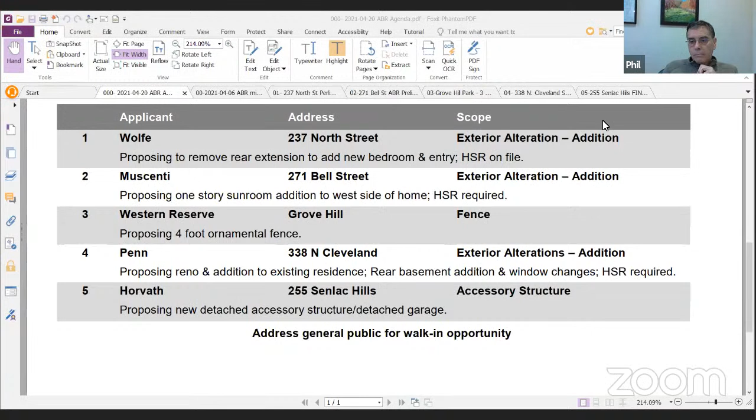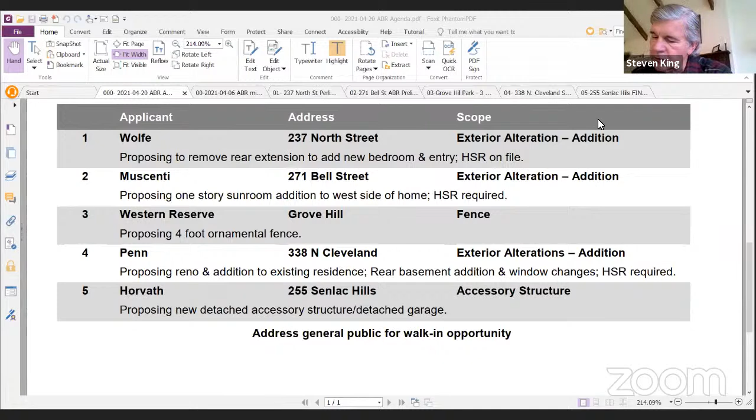First order of business is a reading of the minutes from the previous meeting, which I was not attending. I have a motion to approve the minutes or comments on those minutes. I move to approve the minutes.

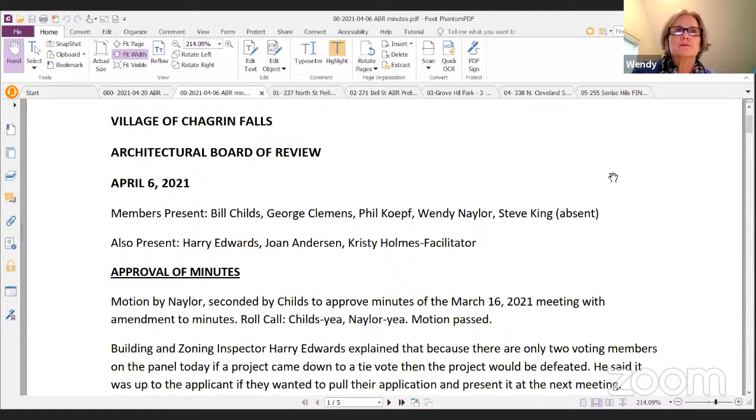We need Bill, I think he's going to be late. Remember, he's getting his second COVID shot today, he was going to join us late. Okay, we'll just push the approval of those minutes back. I cannot comment on this.

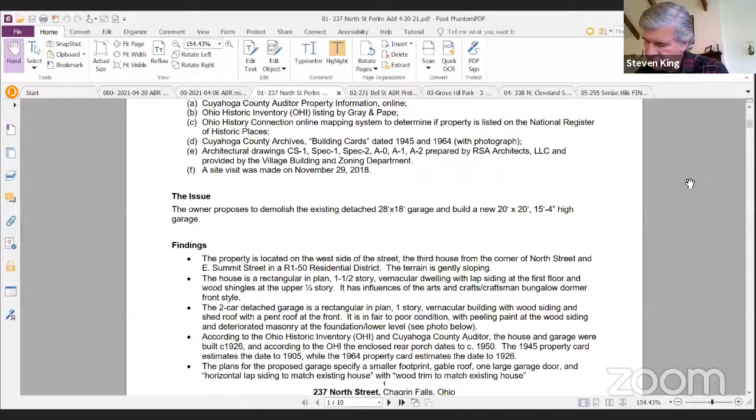Therefore, the first order of business is Wolfe, 237 North Street. We have an HSR on the property. It is not 100 years old, but it is 50 years old. Prospectus did their evaluation, determined that it is not historically significant, even though it is 50 years old, and therefore the changes would not have an adverse effect on its significance. They also determined it would not have an adverse effect on the proximate historically significant structures.

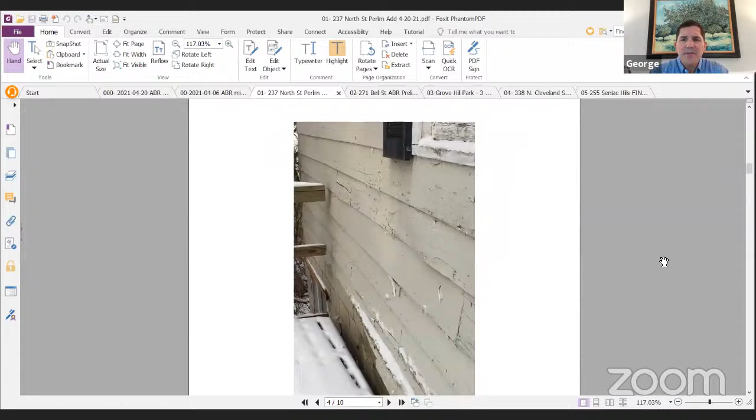I read that differently, Steve. Okay, first of all, this is from last year, but it does comment on the house, and I thought it said the house is historically significant as a potential contributing structure. Yes, all right.

Here we go. The first thing under conclusions, read that. Does meet the standards of historic significance.

So their conclusions about the project are irrelevant because they pertain to the garage, but their general conclusions, and Harry asked if we thought we needed a separate report for this. But I think the conclusions about the house are clear enough that we can treat it as being historically significant and go from there. And that's a higher standard for the project. I accept your correction.

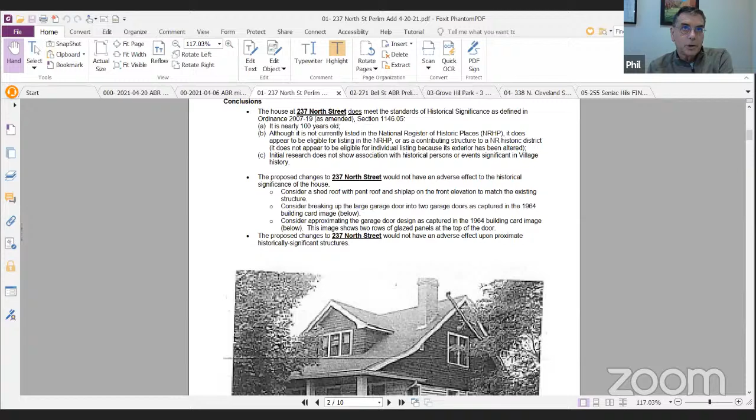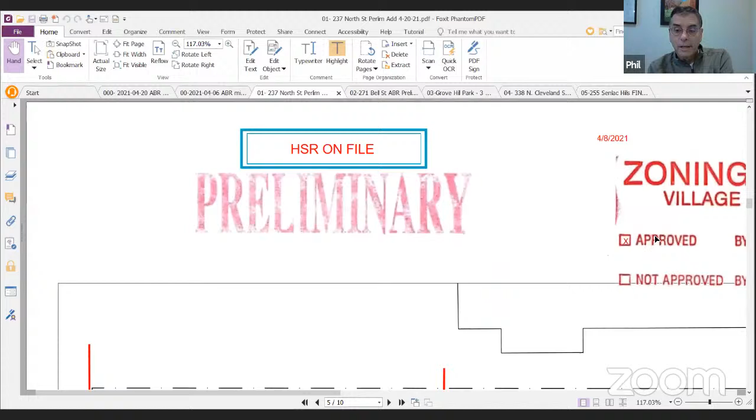So, because we did the garage last year, as you just said, the significance report relates to the garage that was demoed and reconstructed last fall.

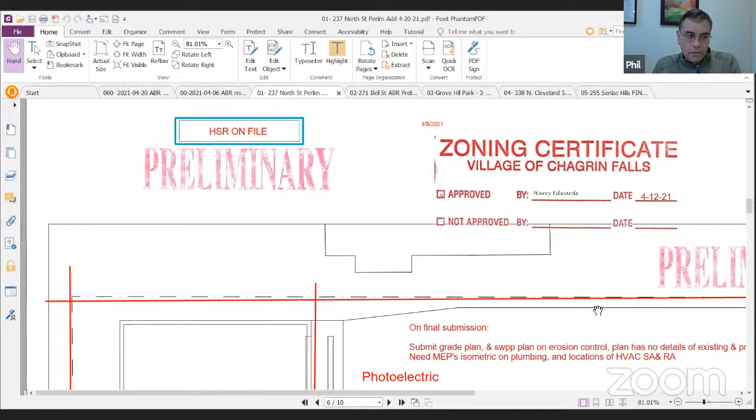The owner wanted to get the garage done last fall, and now is looking to add a first floor master so that they can stay in the house.

What you're looking at there is there is a small, it's now a bathroom, but when it was first constructed, I believe it was like a little dining area stuck on the back of the house, where the dashed lines are in the lower corner.

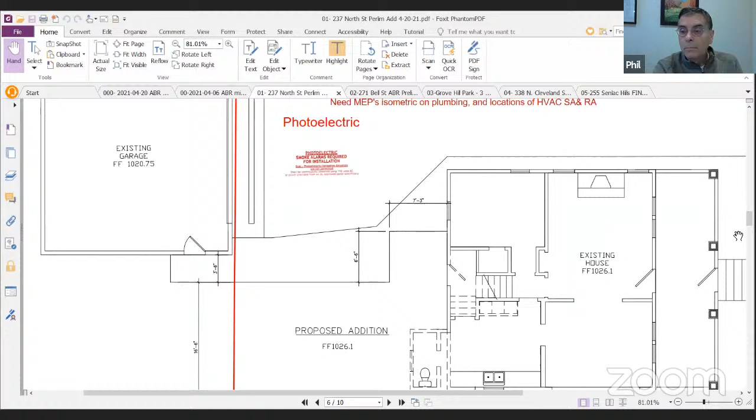Harry, could you move? Let me see. Would you like, Phil? I can do. Yeah, let me go to the next. The A2. So what we're doing is we pushed the garage off the property line so that it was in compliance, and you have to kind of steer around the house.

So we added this bedroom, bathroom, and a new rear entry, and it's all designed so that you can still get in and out of the garage. The house is extended out to the 3-foot property line, and it drops in grade considerably.

So if you look at the next page, Harry, elevations. You can see that by the time you get to the rear corner, it's almost to a new basement level.

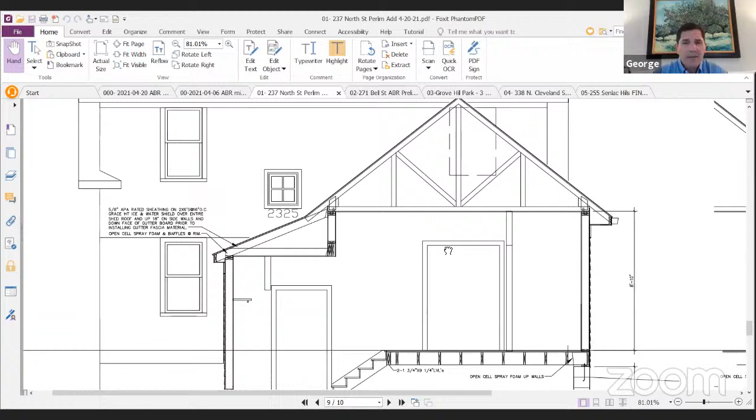Yeah, I think this is nice. I see what we're trying to do with everything, and I like it. If you go back up to the elevations, Harry, go to the right. There you go. In this elevation, I was thinking those shingles are coming down low, but I think it's just because your belly board or frieze board should actually track around the back rear elevation right over those windows, and it got lost on that in the rear elevation drawing.

So if the frieze boards track around, they help separate the shingles from the siding below. I think that will be helpful. Yeah, I agree. Other than that, I don't have any comments.

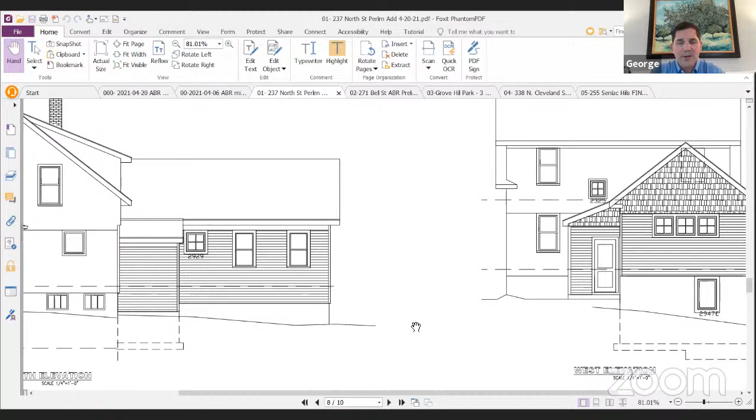I mean, I think this is nice, and it's tricky to fit it in with the garage. You're close to the garage, so you've got whatever fire issues you're probably dealing with, Harry.

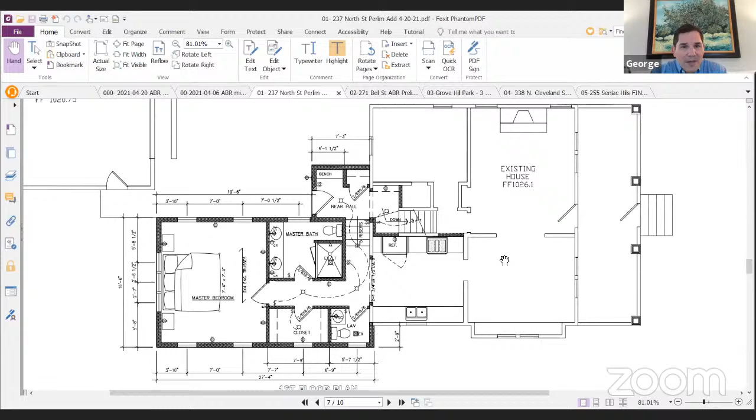I think maybe that master suite, you may want to move the door over so your master bath and closet are inside it, but for privacy. Other than that, I think this is a very nice little addition tucked in, and I don't think it has any adverse effect because it's clearly distinguishable from the house.

And then what kind of windows are you putting in? All the windows are vinyl now. They've all been switched out before he got there. So the new windows are going to be vinyl too. I know you're doing vinyl siding, but are you doing new vinyl windows?

No, I'm not sure I even talked to him. My preference is always wood clad, aluminum clad wood. That's my preference. In fact, that would help, because I understand you're trying to tie the vinyl to the existing house. Maybe you could do something with the windows. My preference, honestly, because these are all venting - the little 12 by 12 or 20 by 30, whatever - they're all venting and you can't do that in vinyl.

So it's going to be Pella wood. And then if you could commit to using the Azek trim that matches the dimension of the house and subsills, so it has that traditional look. I think that group of three looks like it might not have a subsill shown, but if you use those, I think that's helpful.

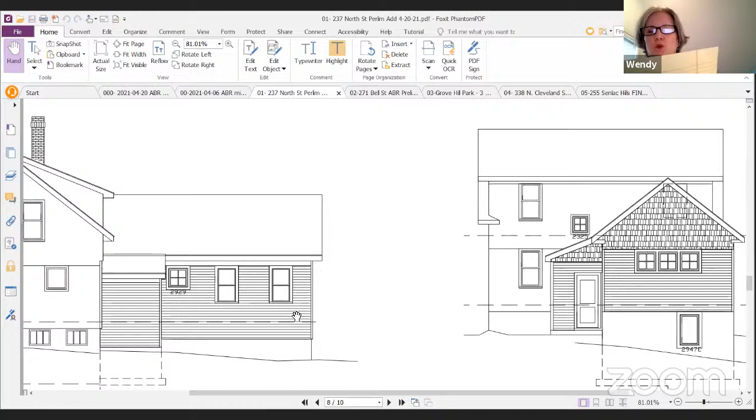Wendy, can you just repeat it? I'm sorry, or you can just send it to me if you want. I'll do it one more time. Motion for preliminary approval with wood or aluminum clad windows, to add trim details and continuation of frieze board to rear elevation, trim and Boral trim.

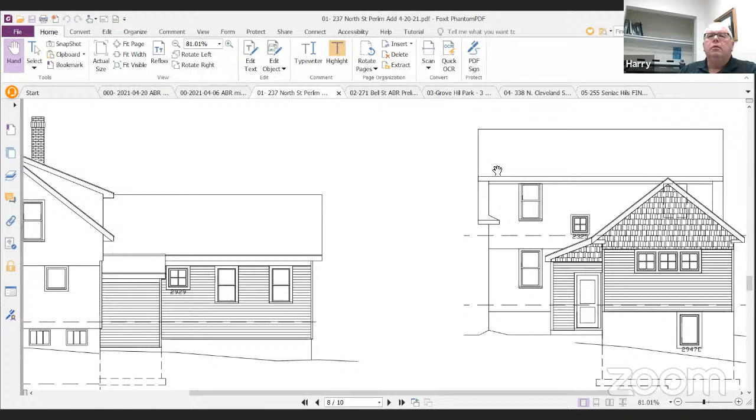Hi Dave, how are you? Good, how are you all? Good, good. Welcome David. Oh, David, hi.

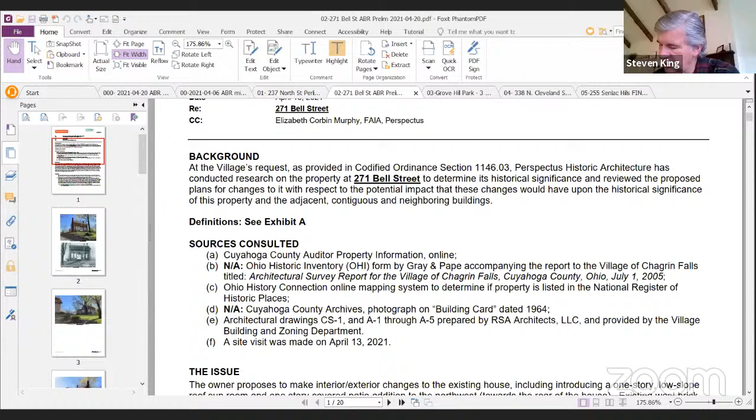An HSR for 271 Bell does meet the standards of a historically significant house. Over 100 years old, it's well preserved for the most part.

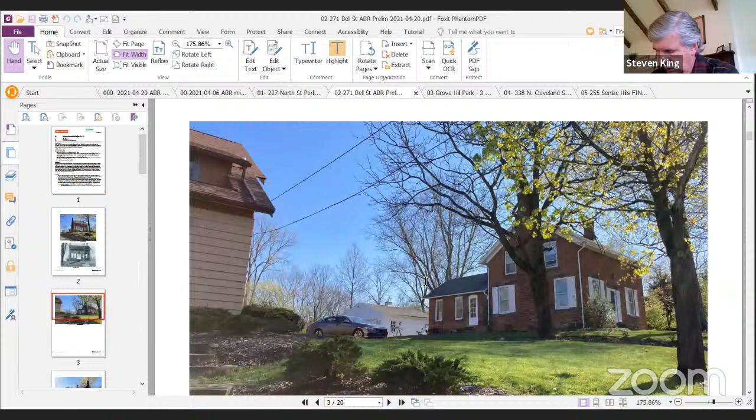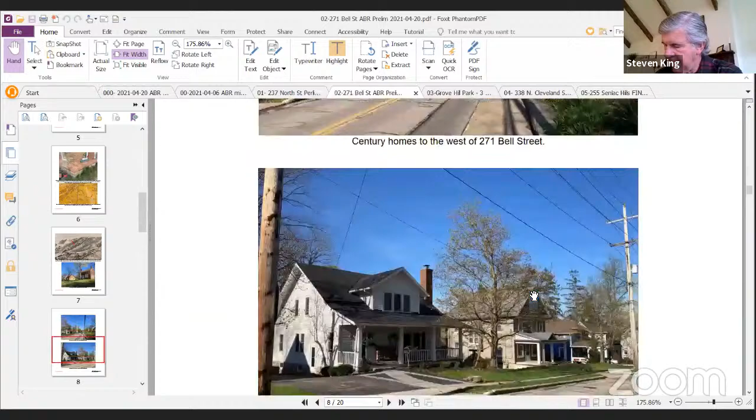They've determined the proposed changes diminish the character of the house as viewed from the street: a large volume added to the house, transom windows, stylized pilasters, bed mold, crown and paneling, and so forth. They suggest lowering the roof line and using different materials. General consideration.

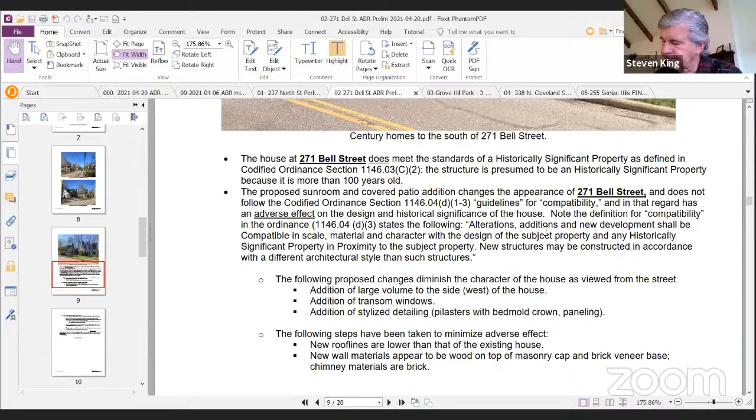So let's take a look at the plans.

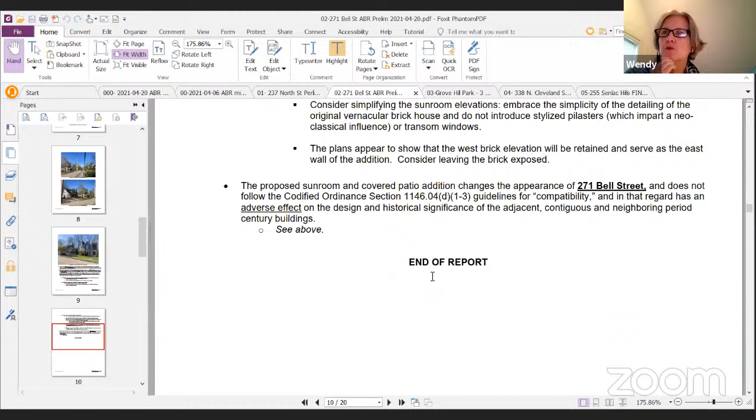Do you want to accept the HSR? Yes, I move to accept. Receive, okay, second, or however you want. Motion by King, second by Naylor to accept HSR. Naylor, yes. King, yes.

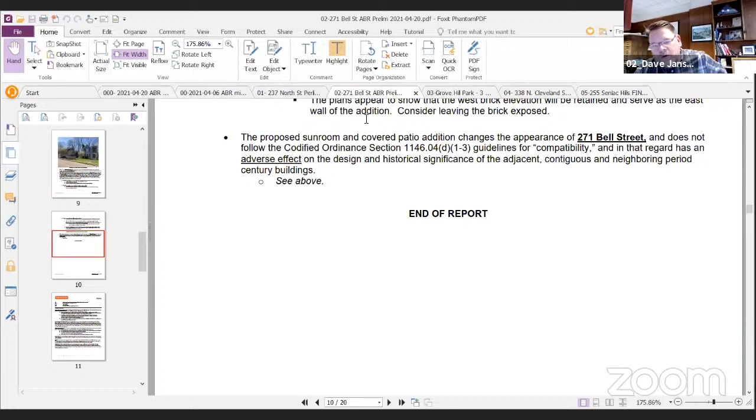Here we go. Wait, could you go up to the site plan just for a sec?

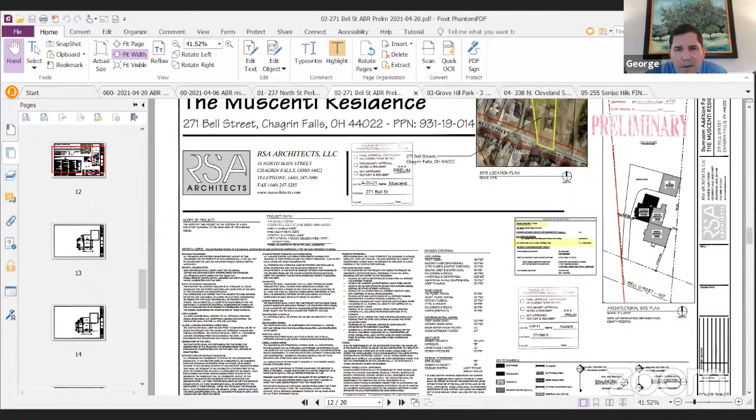Absolutely. Thanks, Harry. So it really relates from the street, it leaves that front house as it is, doesn't touch the front house. It really relates sideways to the rear. Gotcha, thank you.

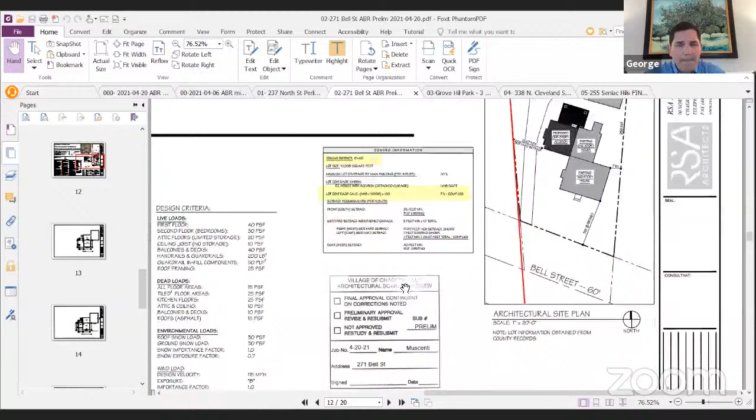All right Dave, we'll turn it over to you, you just tell me what page you want me to go to. We'll start with elevations, obviously. So yeah, like George had said, when we were looking at this, the idea was to try to leave that original portion of the house by itself, so we didn't impact that.

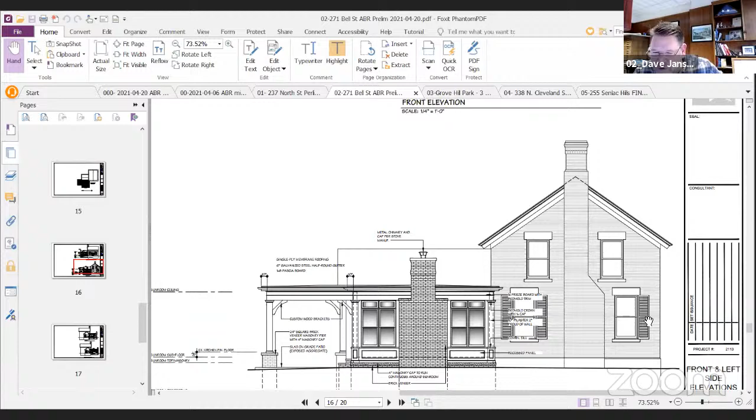I believe the rear, and I think it even said so in the report, was probably not original to the house, which is what kind of facilitated where it goes, and it also worked well for the layout because that's where Tom's kitchen is right now. The other design intent was to not do this thing out of brick, try to make it stand out on its own, so we're not trying to fool anybody into thinking this was original to the house.

The idea is to get a nice sunroom, sitting room for him. The house is, by today's standards, fairly small, so it would give him a room that he would like to watch TV or whatever. So in doing that, I guess I tend to want to make it as nice as possible.

That's why I didn't want to have any siding on this. I was trying to keep it to basically all trim and recessed paneling as much as possible, to use a consistent window size around at least the two sides, and keep it as a low roof so it would not compete with the height or the scale of the existing house.

Looking at the HSR report, I think I could see where they are coming from, and the owner might be open to, I could probably reduce a couple feet out of the width. Looking at the front elevation, that width, it may be a little bit out of the depth.

So I think I could get that 19 feet coming from the house down to maybe about 17, and whatever that width is, I could probably take about a good 16 inches out of that, without making a huge impact on the use of the room. It'll push it further back from the front elevation, so it'll get closer to that existing door opening that's there now. Oh, I see.

Well, I mean, this is just straightforward, you're adding a room and a little covered patio, but you're basically replacing, I mean that's your rear entry as well, right? Yeah.

I mean, I'm not sure, I think it's successfully scaled down from the house with the flat roof. The historic report did not object to the flat roof, and I tend to think the flat roof is a pretty good solution here because it differentiates so clearly, and I like the fact that you don't have siding on it, that it's paneled.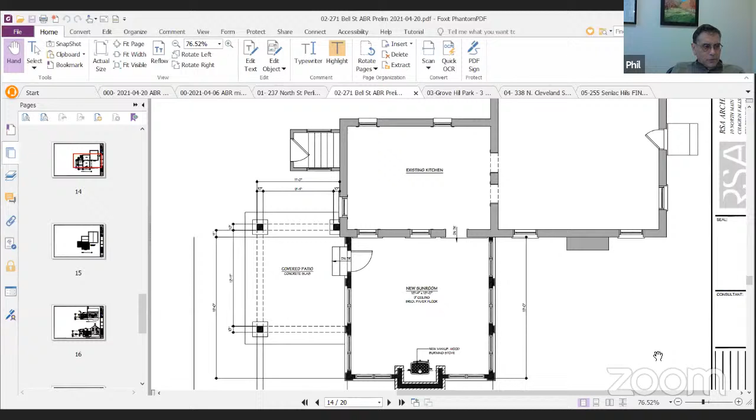The difficulty I have with the transom windows—I like what you came up with, I like the cadence and the scale of the things. But to me it seems almost too much detail. And the transom windows, I just got to believe there's a better way to do that.

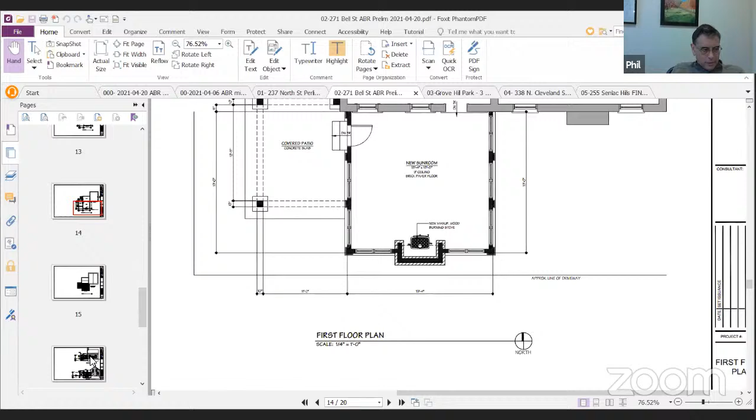What if you just made them tall, narrow windows? Taller windows. You can certainly eliminate the transoms with taller windows, and you save so much in the framing of those transoms.

The design of that house is very simple, and I think the simplicity of it is what's so wonderful about it. I'm not seeing any paired windows in the existing house, and I'm wondering if you can translate that into a simpler design in the sunroom. I agree the scale's good, you've set it back, you've tied it to the house, but I'm still finding too much action going on.

Did you look at just tall casements or something? I did look at tall casements, but the owner did want double hung—not that we couldn't have that discussion. I could look at making a taller window.

In response to the amount of detailing going on there, my thought is it's a sunroom, so we're not trying to repeat the aesthetics of the existing house. And I think once we have this thing all painted out white, it's going to flatten out—all those lines you're seeing are going to become very blurred. I guess I hesitate to make it too simple.

I think your next step towards simple is making this a complete modern design, and I don't know if the board would prefer that. If you want to see one window, it's instead kind of a solids and voids pattern. That's where I'm going—something needs to blend a little more with the existing house. I know you're trying to do a sunroom, but I'm coming from a different direction altogether here.

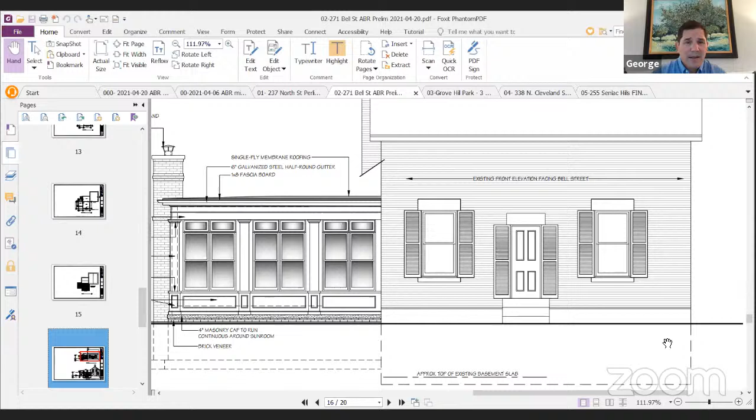I think this is going to be a calmer approach, and I agree. I think you can get rid of a lot of lines by just extending the double hungs upward. And taking your point, Steve, I think using pairs of double hungs is going to feel more comfortable with this simple double hung house - double hung windows with no grids, no muntins. Maybe there's a way to make this simpler if you do brick pilasters, and all you do is like 12 by 12 brick pilasters around the thing.

But I do think that's a pretty calm approach. When you paint it white, no one's going to think twice about it. And I think the flat roof really lets the little schoolhouse stay little, because this reads like a separate thing. My fear would be to put a gable roof on this - it would totally drown out the original house. I think that would be really big, that would be a mistake, especially at the roof pitch it has.

I do think that bed mold - to be super picky, but Bill's not here - the bed mold ought to come down so it's like a third up, then above half. Yeah, that's just my classical comment.

I think the biggest thing for me is the windows. It works, it accomplishes what the owner wants to accomplish. Push it in, push it out a little bit - I don't think it really substantially changes how this is going to feel. But don't make it a foot smaller, because if it's too small, it's a terrible waste.

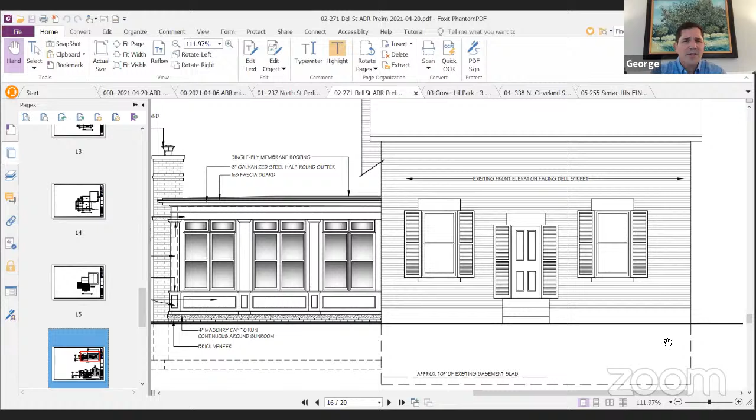Harry, can you go to the side elevation? I think sometimes I wish I'd just drawn trees on it, and that's probably what it's going to look like, and no one's even going to see this thing. You're allowed to do that. Yeah, there's the rear - oh wait, what about the side elevation?

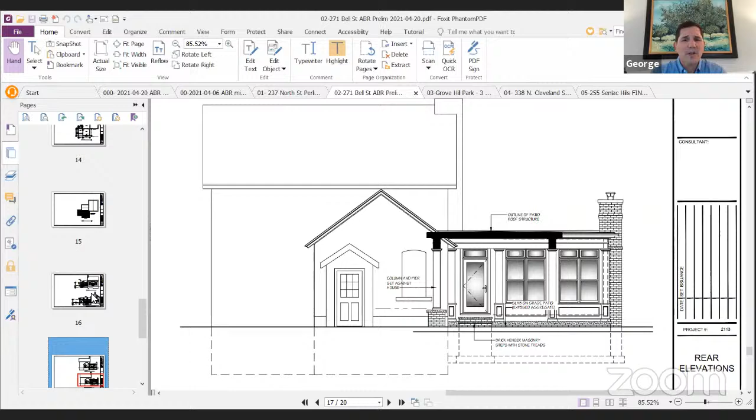Well, go up to the rear elevation that doesn't cut through the entry. Which is nice, I think. Same comments. Then what about the side elevation? I think the side elevation shows how far back this thing sets, which is really critical.

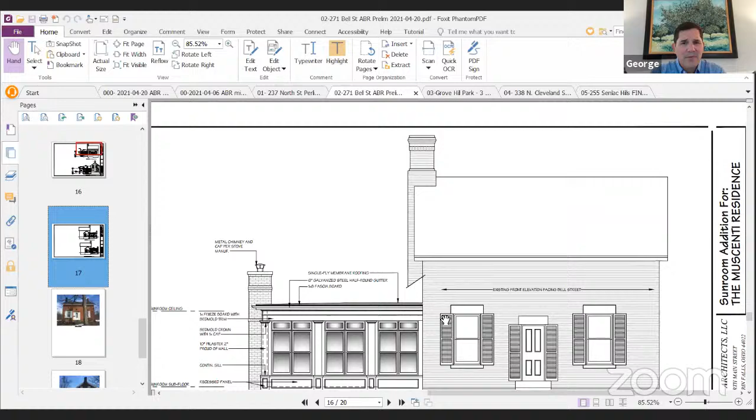Oh yeah, right there, down. There we go, thank you. I think that shows you really stepping back and letting the old schoolhouse still retain its character completely, which to me is a successful strategy. I just think that's the right way to go - so much better than if it was on the side of that schoolhouse form.

And it clearly still reads as an addition, I did, obviously. We're in, I used to do a little more historic work before, and that was always critical, at least for the state of Ohio, that additions read as additions, so you can still identify the original house or structure.

So are we ready for a revise and resubmit? Yeah, motion to revise and resubmit with restudy of windows and simplification of design. Sounds good, I second that. Motion by Naylor, seconded by King for revise and resubmit. Naylor, yes. King, yes. Okay.

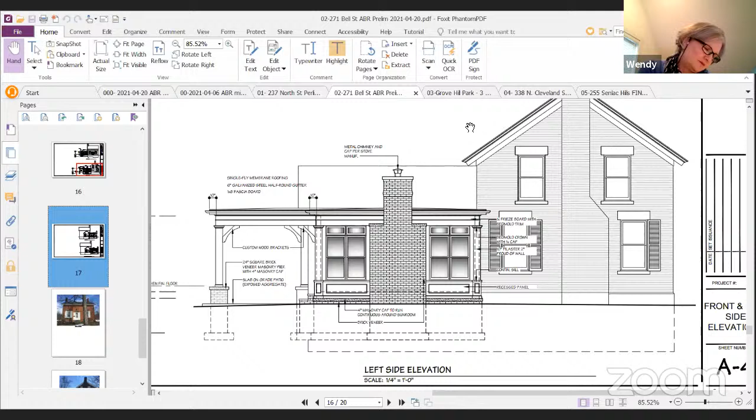Is that submission this Thursday, Harry? Or Friday? Friday. See you Friday. Very good, thank you, sir. Thank you, thanks everybody. Hey Dave. You're welcome.

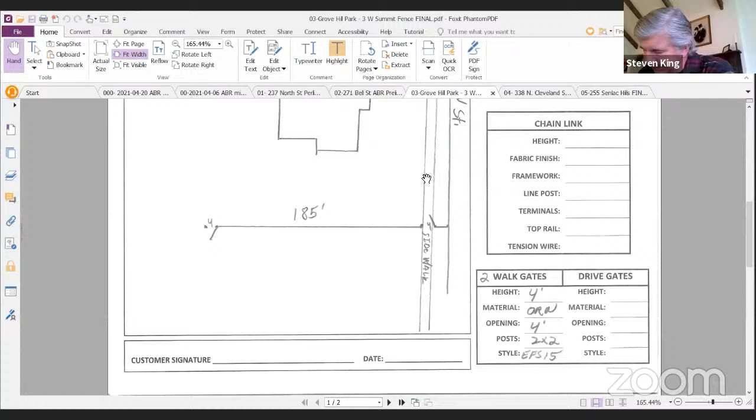Grove Hill. The fence, yes. So let me give you a little background here why Christie brings up Amy.

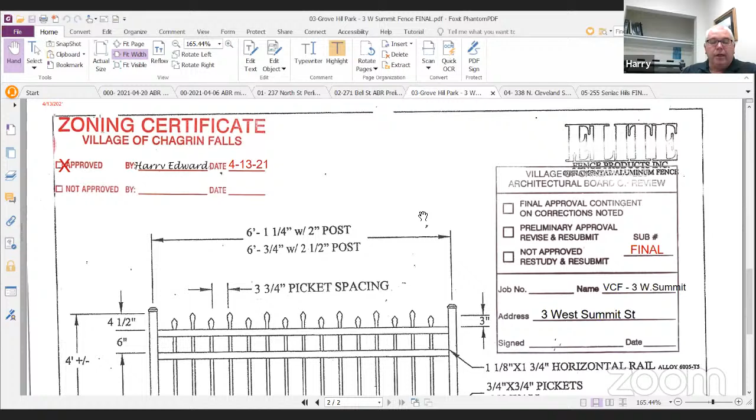This fence is in conjunction with the Village of Chagrin Falls. It's a fence dividing the proposed Grove Hill Park from the back of the Galucci House at 3 West Summit Street. It was part of the deal to save the Grove Hill House, like one of the last components. And it's just across the hill in a straight line.

Correct, I think this is really straightforward. It's going to be done nicely. I think we should just go ahead and vote on this and say let's do it. I think she's going to bring Amy Sargent from the Western Reserve Land Conservancy to talk about it. Good morning everyone. I'm not sure what you need me to present or share here, but if you have any questions, I'm happy to answer them for you.

Where does the fence sit in relationship to the bluff? It's about halfway down the hill, it sort of separates the property in half. So there's a half acre towards the top, kind of that drop as I recall on the property. So is the fence just at the lower end? Closer to the base of that drop. Okay, yeah, okay.

I'm good with it, but I'm trying to determine why we need a fence. I think it's being offered to differentiate the property, the private residence, from the village-owned portion, so people don't wander up the hill and feel entitled to it. Exactly, because historically people have walked through that property and accessed the sidewalk and gone up right past the house. So this is to offer a little privacy and separation to the residents, and it will also delineate where the park that belongs to the village is.

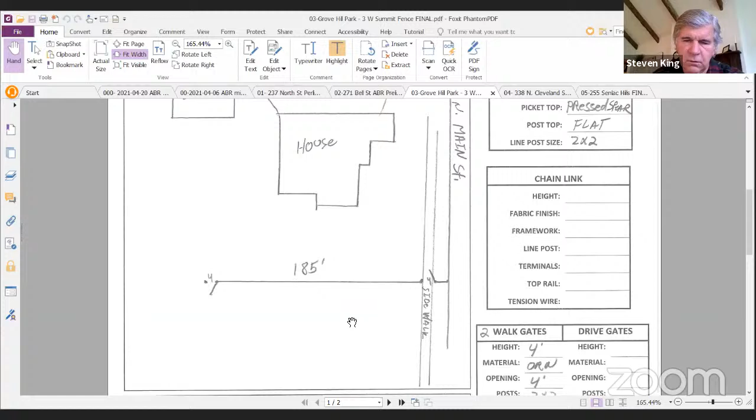So it runs straight across the hill and has a little tail on it, but it doesn't really... What's the tail for? That's a gate on the other side, I think, a second gate. At the gate at the other end? Correct. Okay, well, I'm not sure if that's the end of the fence, you don't need a gate there.

Well, I believe there's a little stone wall in there on that edge of the property. Is it the foundations, the old foundations for the greenhouses, I think? Is that right? That's way up there. Yeah, I think it's higher. So in other words, this gate is abutting some kind of existing stone foundation or wall?

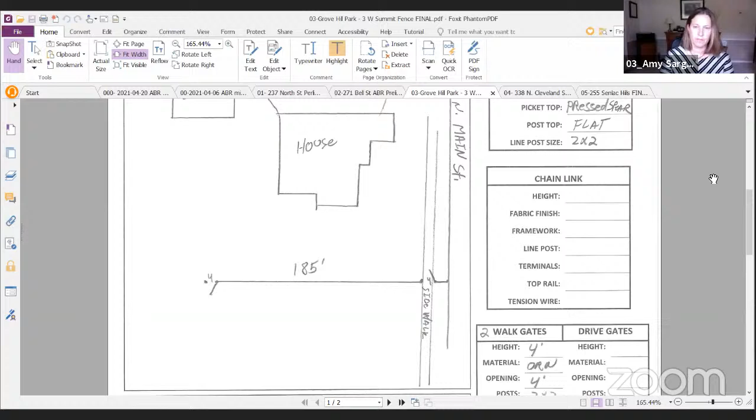I don't recall exactly, but I know the fence is to go to the end of the property, and there's a lot of vegetation. I'm envisioning a portion of a stone fence or stone wall there, but I'd have to go look again. That was at the request of the village and the homeowner, to have a gate at either end. Galucci's in on this? Oh yeah.

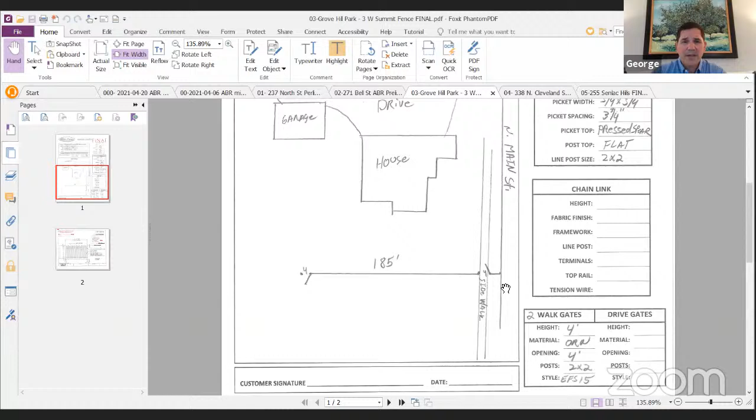I think you could give them the benefit of the doubt that it all makes sense, or we could have it taped out and go look at it. I'm inclined to give them the benefit of the doubt, but the other way is to have somebody mark it with orange tape so we could see where it really is. Was it staked out at all? Yes, there are some stakes in there from when we had the survey done for the property boundary, and that area has also been cleared in preparation for the fence.

It sounds fine. I personally like to take a look at it if there's no rush.

I don't think there's a real rush on this timeline for installation. It will take a couple of months once we order materials for them to come in, and the fencing contractor, Elite Fence, doesn't want to order materials until we have approval here.

Do we have an objection? Doesn't sound like it's a problem at all. I would like to look at it.

So you want to table for two weeks and then we'll go out and take a peek at the site? Sounds good. And this is a metal fence, correct?

Aluminum, yeah. What's the material? Is that some kind of aluminum? It's an ornamental fence, and the material is aluminum. It's not like a structural fence meant to withstand anything, it's more ornamental, the kind someone would use around a property.

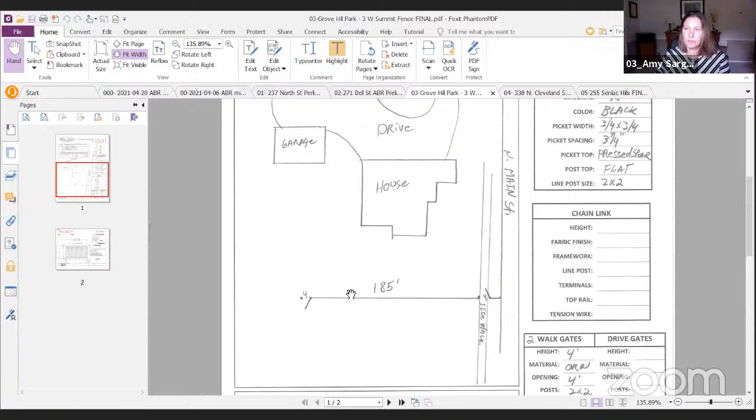Great, so we'll table this. Thank you for allowing us to go walk the site. Amy, you'll get another invite for the next meeting, which will be on May 4th. Okay, that sounds good. Thank you. All right, thank you for your time.

Board, do you have anything else? You want to move on to the next subject? Sure, 338 North Cleveland Street. Exterior alterations, addition.

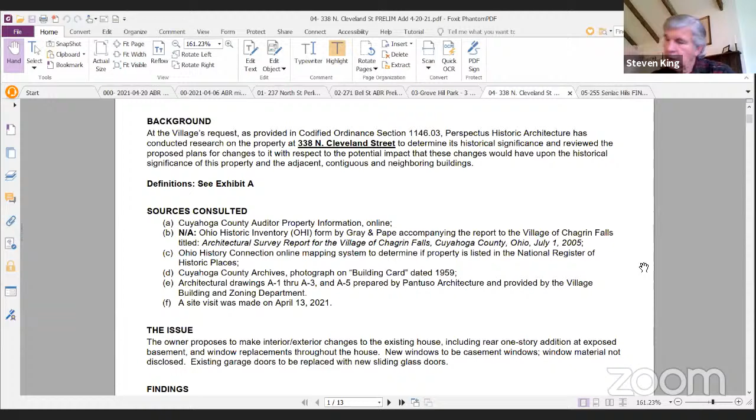HSR. The house is over 50 years old, so it needed a Perspectus. The Perspectus found it not to be historically significant, and therefore there's no effect on itself or other structures. I guess there's no structure in the area to be affected by it according to them.

I move to receive the report. Second. Move to receive HSR, King, seconded by Naylor. Naylor, yes. King, yes.

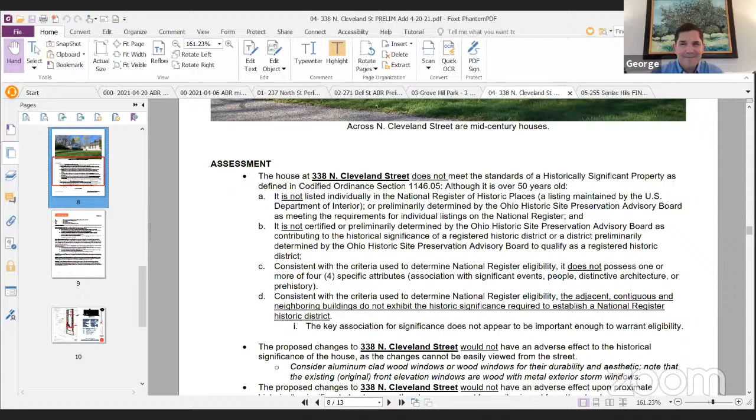Hi, Becky. Okay, morning. Morning, Becky. Morning.

This is the project we had previously. They're nearly complete with the detached garage, there on the right, and now we're doing phase 2.

What is the addition floated in your drawing? Yeah, it doesn't look like it's attached to the house, but the plan shows it that way. How is that? Okay, so...

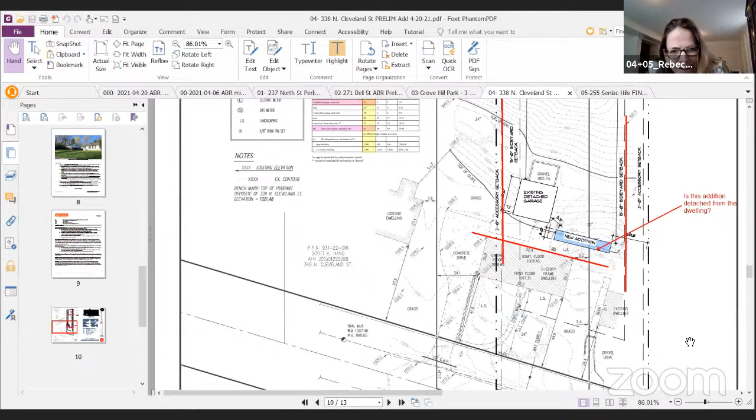Oh my goodness, yeah, something happened there. Wait, that's it, almost like the house floated because the house looked like it was half off its site, like an overlay. It's like a bumwad overlay or something. I think the house floated away. Your underlay showing the house floated away, that's what happened. I was thinking we'd do something special on this one. I didn't think it'd rain that much.

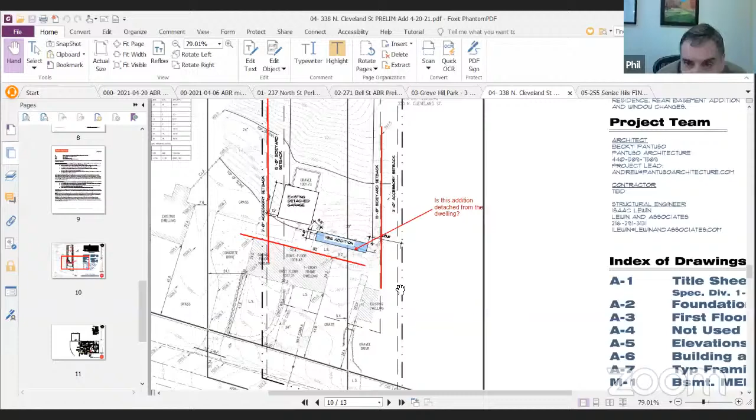So, it's an 8x50 trailer you're parking in the back. What the hell is that? I think...

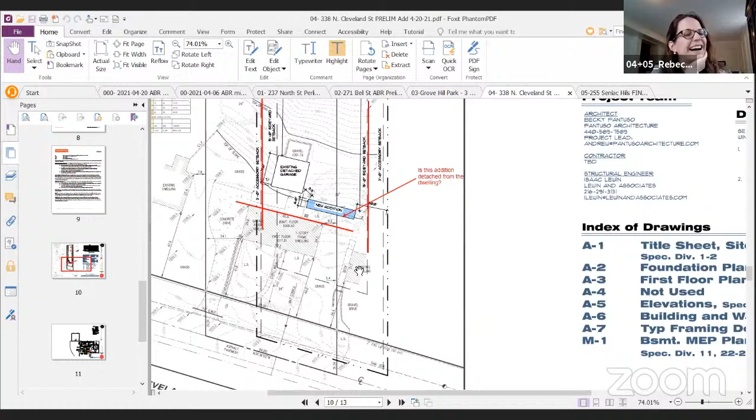Obviously you got to resubmit this to Harry, but if the location of the addition is correct and the house slid... No, it's just a viewport issue, like we have an underlay that just slid over. It slid over. God, okay. I didn't see that.

I don't know, but so if you go down here, this is obviously what we're trying to do. The garage is in that upper left-hand corner. We're tackling phase 2 of 3 now, so this is actually a really modest addition on the rear of the house.

It is the foundation plan. I mean, it's kind of like a raised ranch, so you come in on the upper level in the front.

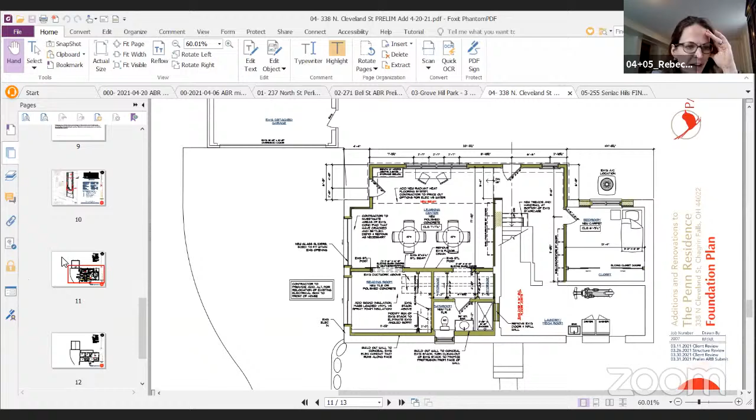So they have like a daycare downstairs or something? Well, not a daycare, but they do homeschool their children and periodically combine efforts with other homeschooled children. So actually really quite convenient in this time of COVID where all too many of us are homeschooling our children. God, hope they turn out okay.

A little COVID event every day there, huh? Oh my God, we're not going to solve that today. Yeah, sorry for what I'm contributing to society right now, but this is the addition right here on the back.

Like I said, pretty straightforward, modest addition to make that basement area work. Now that we have the detached garage, we can close off the existing garage and make it livable space.

Hmm, see that? I get it, I see. That makes perfect sense. So just sequentially, we had to do one before the other, and now they're ready to do phase 2.

You might want to review the historic report, because there is one, and it says it's not historically significant, correct, Terry? That's correct. We probably should do that first, huh? They already did.

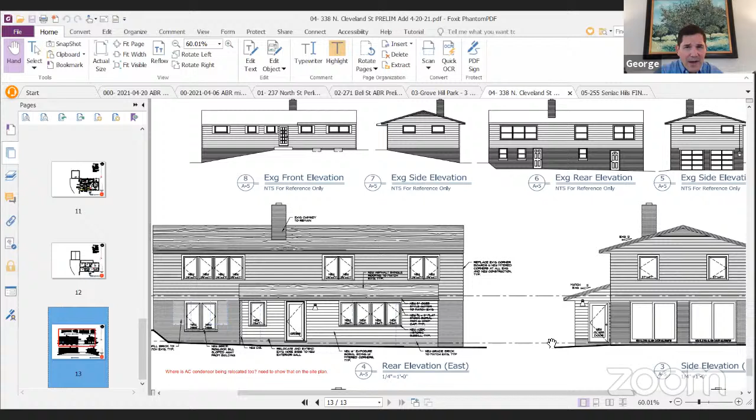My comment is, I see this as a consistent approach, and it's also an approach that works with the modern massing, low roof pitch kind of appearance of the house. If you're doing it consistently around the house, I think that could be a nice look. I think it's a vast improvement.

How will the siding work if the front of the house is phase 3 or 4? How will the siding matchup work? Or are you siding the front of the house? We are trying to figure out the timing of that. We're not trying to balance it. There's only one more phase.

And if we can pull it into this phase 2, ideally, that's what we do. There may be just this back addition done now, and the windows done as part of phase 3. It's kind of chicken and egg, because we're going to do a small addition out front, and I don't want to put all the new Hardie on and then rip it right off probably six months from now.

We're kind of looking at this as the long range plan, except you just mentioned something about the front. Yeah, there may be a porch addition in the next phase that addresses the upper floor. Right now we're on the lower floor, we'll do the upper floor next.

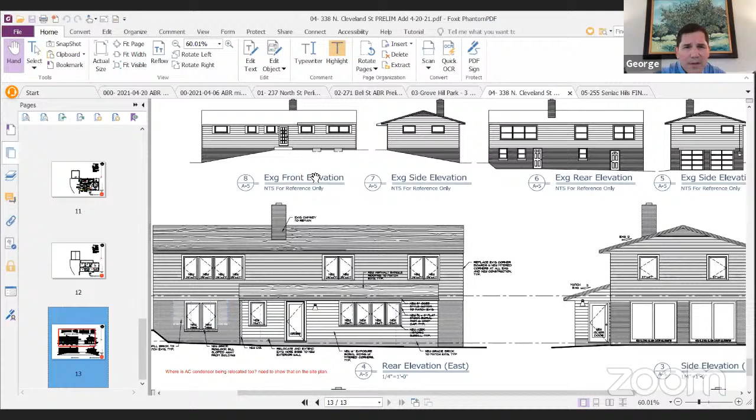We're not even looking at the other side and front elevations in the submittal, or are they included? They're all here. I need to look, Carrie, can we see the other elevations? I'm showing you a front elevation right now. That's existing, if you just scroll down. Yeah, it was on the same page, they're all on the same page.

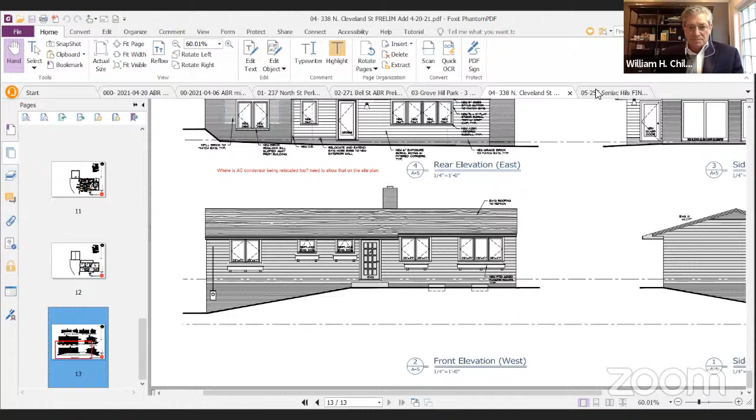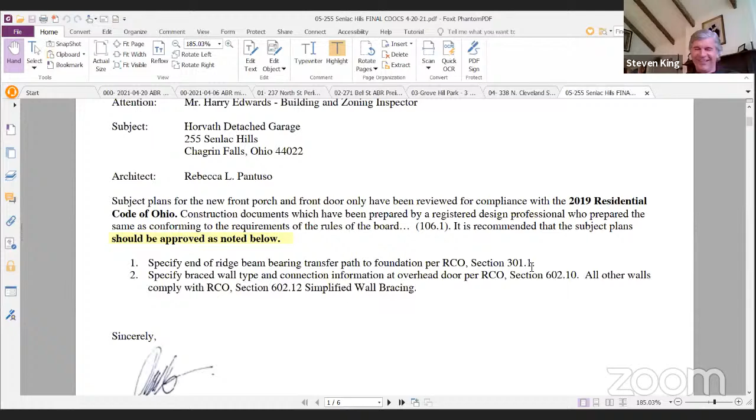Moving on to number 5. Anybody have a sore arm? Oh my God, is this your number 1 or number 2? This was my second one. Oh yeah, do we want to approve the minutes first or no?

Oh, that's a good point. I don't know if it's regressing, but circling back, Bill, I couldn't vote on last time's minutes because I wasn't here.

Motion to approve the minutes from the last meeting. I'll second it. So motion by Naylor, seconded by Childs to approve the minutes. Naylor, yes. King, abstain. Childs, yes. Okay, thank you.

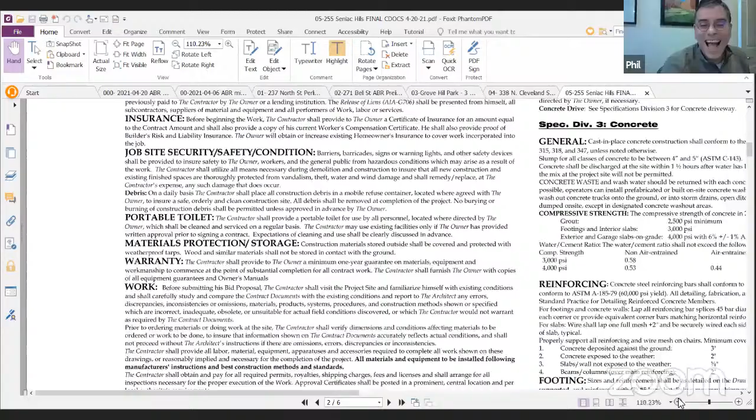255 Senlac Hills, accessory structure. By the way, I Googled it, and Google says detached. So unless we're in central Ohio, it's a detached garage. Thank you for that clarification. Detached.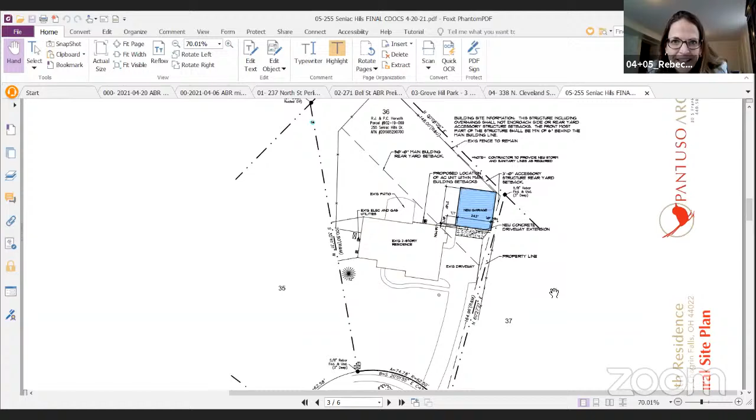So you moved it back and over? We shrank it ever so slightly, moved it back so that we're behind the overhang of the existing house, being the rear plane. Our overhang was in line with the rear of the building before; now our overhang is behind the overhang of the main building, so it's behind the rear building line.

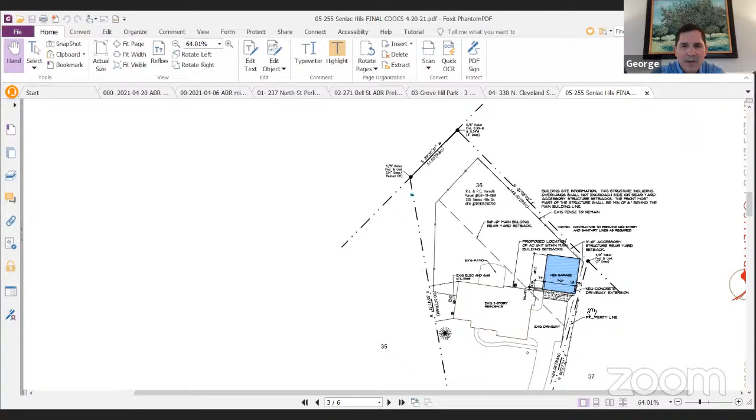Well, right, so if it meets zoning now—we liked it before, so this could be a quick one. Because nothing else has changed on this garage, correct? No, it looks great. Correct.

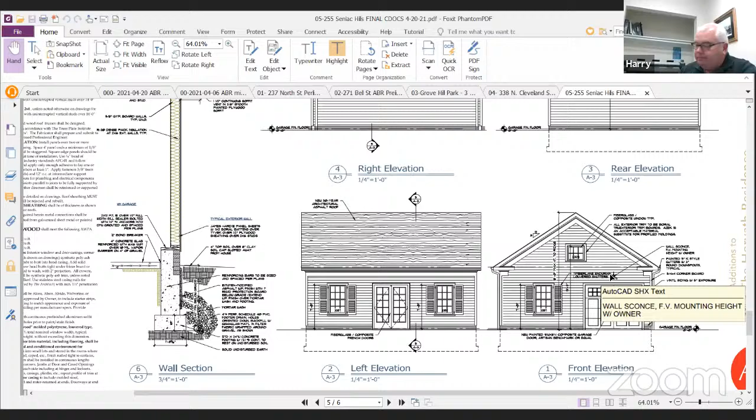All right, good, that concludes your regular agenda. I don't know if there's anybody who wants to walk in.

Only walk in on sunny days. Right, if there are any folks walking in today, please use the raise your hand function in Zoom to let us know—we don't have anything on the agenda or we're not informed ahead of time.